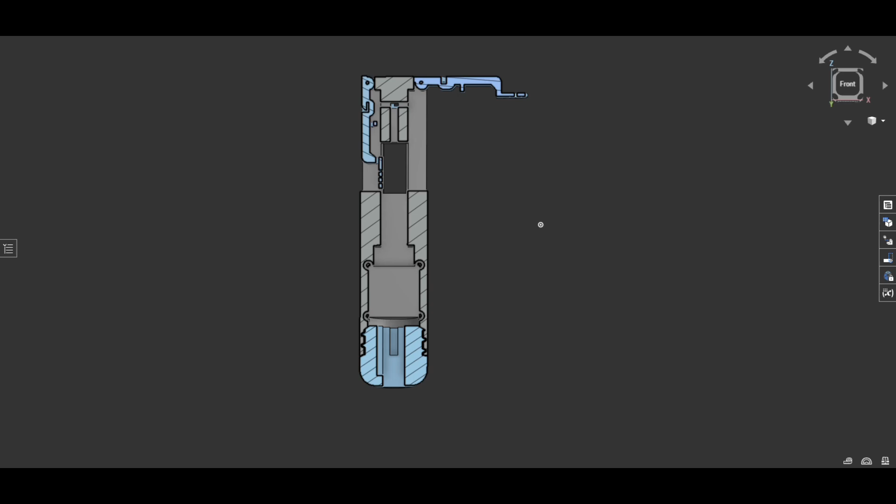Hey guys, so I wanted to give an update on the CAD design of the FL UAS from ARMA 3.

Here's kind of an overall assembly. You can see I got the arms on. I don't have the arms quite finished yet, I need to make sure they clear the props. But everything else is starting to fit together nicely.

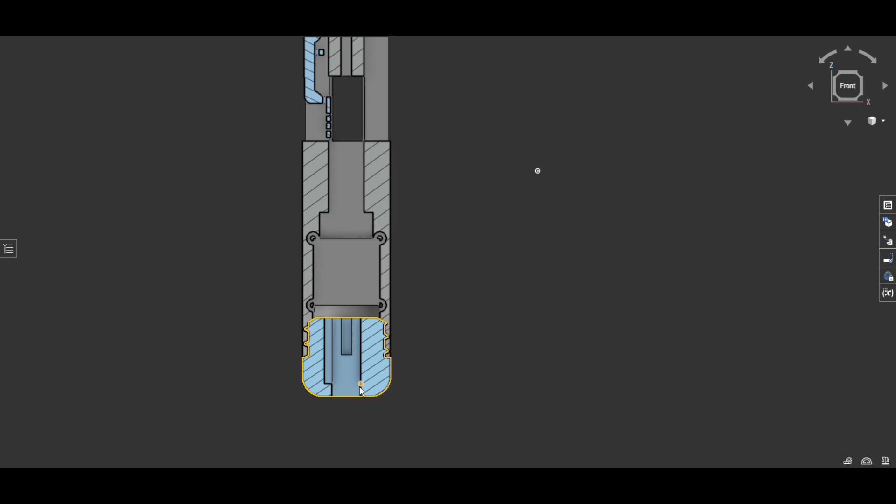Here's a cutout for the flight controller, VTX, and camera. Here's a battery, and then some more space to run wires through to the flight controller. And then up here, more battery space, and also where the arms are going to be coming in at. So as you can see, well, that's not going to work, of course.

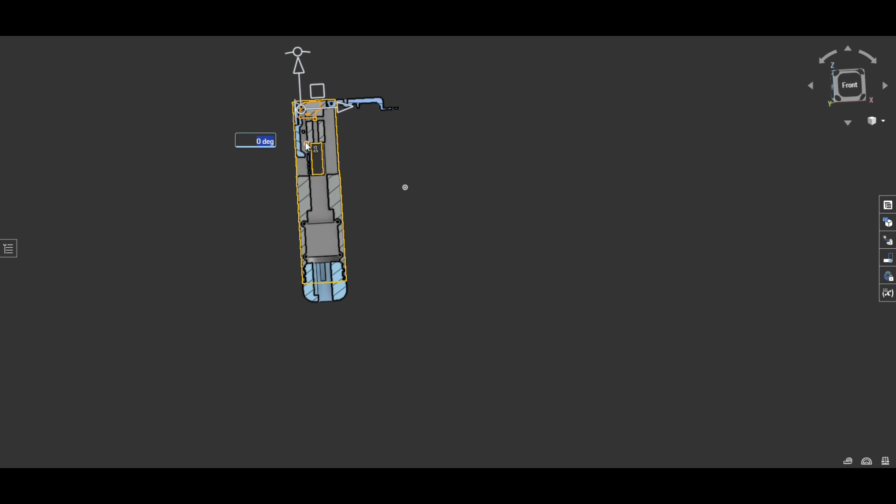Great. But anyway, they're supposed to move. We'll see if I can turn off the section view and if it'll work. No, awesome. What about this? All right, anyway, well, that's supposed to unscrew too, but whatever.

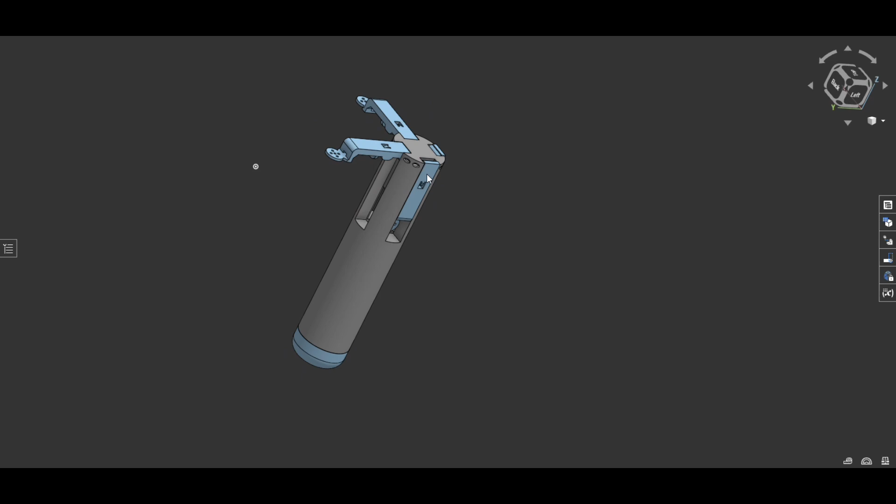Anyway, so there's kind of like a little preview of what's going to happen so far. I might cut a few air holes here so I can get some airflow onto the flight controller. There's the camera again, so 2 cuts here for the VTX, and then here's for the camera - it has 2 pins on the side that I'm going to use to keep it stable, and maybe put a 3rd pin here, I don't know, we'll see. But yeah, it's coming together pretty nice.

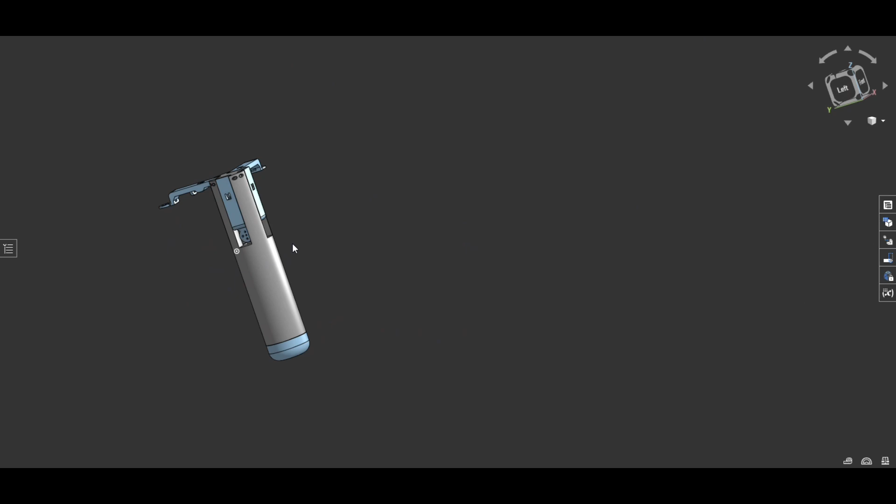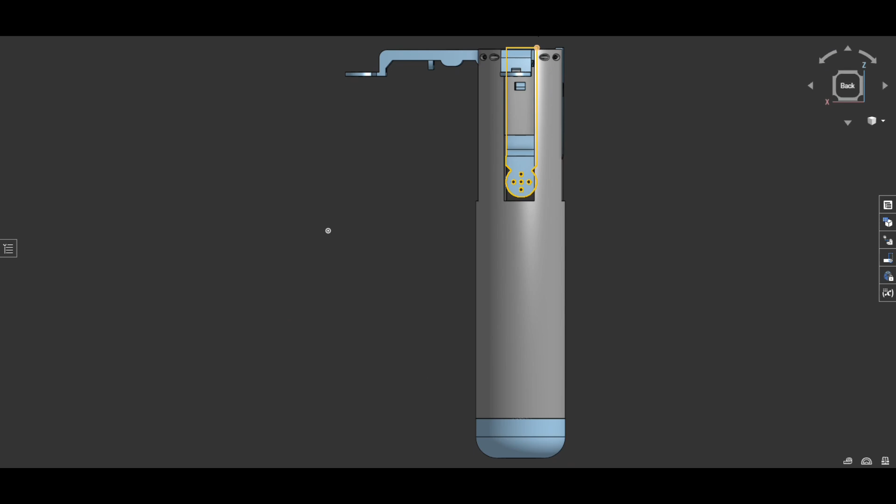So hopefully I'll get these arms finished up. I'm going to run some rubber bands or something across the top to kind of spring load the arms to come out. And then after that, here's some motor wiring - run the motor wiring through here, under here, and then into this little tube. Sorry, into this little tube right here, and then run it down kind of with the battery. And go from there. And then these little holes up here are for the pins to keep the motor joint or arm joint stable. I don't know if I really like that design, but it'll work for now.

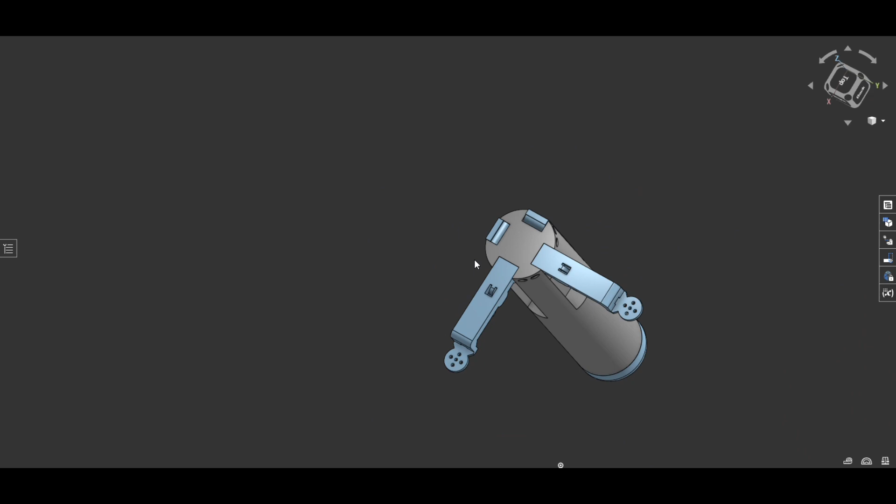And then there's a little lip that comes up, so that way it'll hopefully stop the arm from going crazy when the motors are actually mounted in high throttle. But we'll see, depending on the tolerances of my 3D printer. You never know. So that's a little bit about progress.

All right, I think I figured it out. So I just refreshed the page and magically it started working again, mostly.

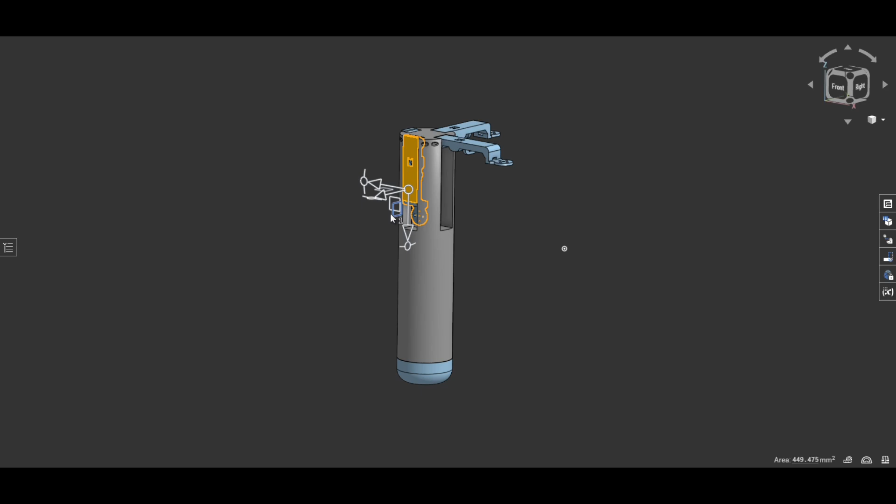So, yay, arms go up, go down, perfect. And here's the kind of like screwed in camera mount.

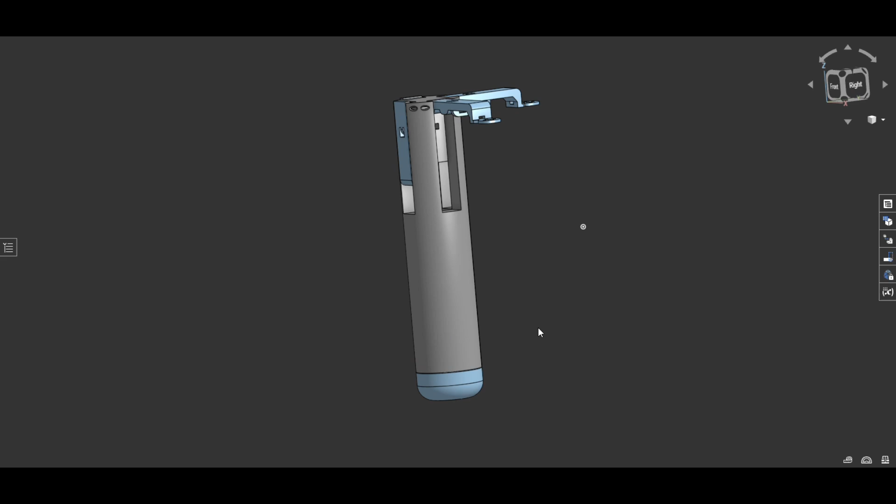We'll see, I might change that a little bit, but I kind of like the idea of having a modular nose so that way you can change it to have different payloads or whatever you want. Like if you want to throw a Meshtastic or something up there as a repeater or something cool like that, that'd be sweet. But we'll see.

For now, it's just going to be a camera. So thanks.